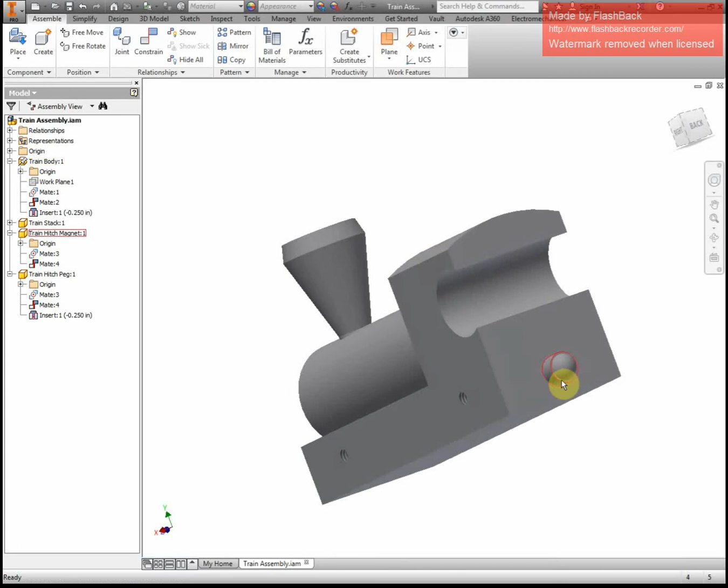One would be to make edits while I'm in an assembly. This is the train body with the smokestack, and I have the hitch peg and hitch magnet in the back. I'm going to make some edits. I told you in a couple of videos before that I need to round or fillet all of my edges, and I need to put the axle holes on the other side of the train body. I thought might as well show you this in an assembly.

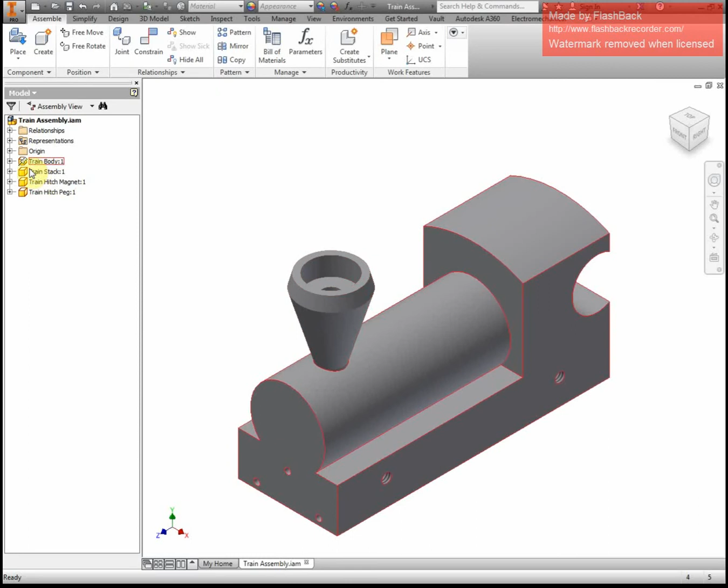It's a little bit different than the other ones, but there's really only one major thing you have to start with. If I'm in an assembly, off to the left you'll notice you have all of your parts listed. In that parts list, you'll see the train body, that's the first piece, and all the pieces are listed here. Double click on train body, that allows me to look at just the train body.

If you notice right here, the smokestack is a little bit hashed out or faded, same thing with the peg on the back. It's almost see-through. The reason is I am only technically working on the train body right now, everything else is left alone. And my bar up at the top, the browser and everything, is all the same as if I'm just working on the train part, if I just open that part like a normal thing.

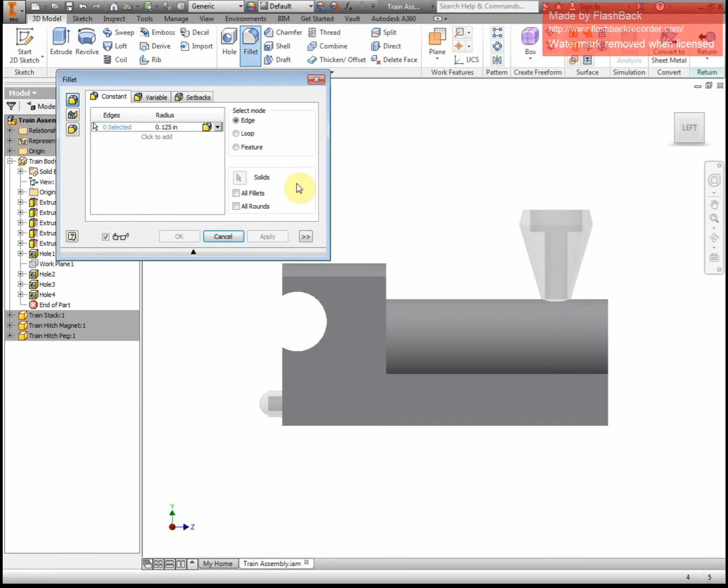So now let's go through and fillet all of the edges. We're doing it to 0.1. All I'm going to do is click on all of my seams, all of my edges, everywhere, making sure I get all of them, even these curved pieces here. I need to get these inner pieces, this outer one, that back there, just going through and clicking all of those edges.

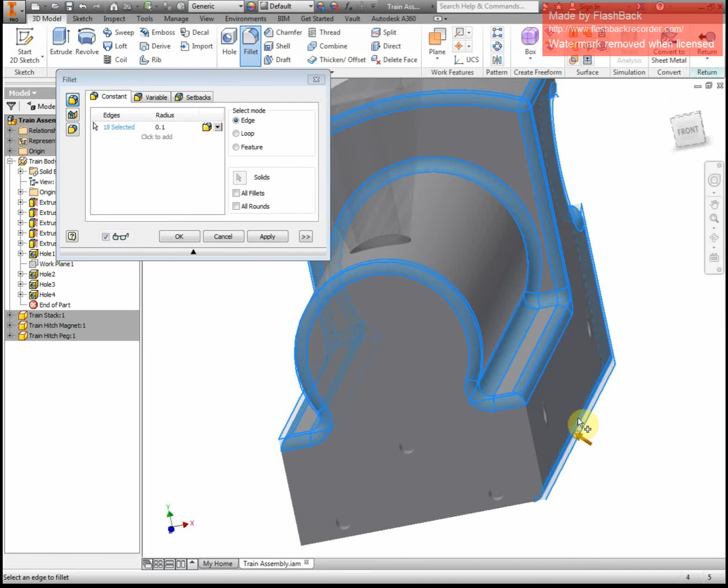It says to do everything except drilled holes. Keep in mind, this one back here is not a drilled hole. Other edge, the front, this top edge in the back. It's best if you can get everything on one pass, and then you don't have a whole bunch of pieces you have to edit around later.

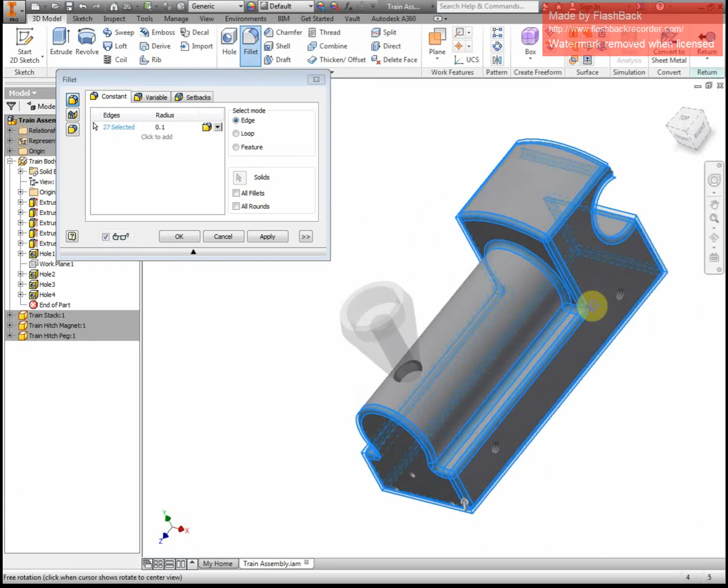This in the top, that one would be a drilled hole. Same with my axle pegs. It looks like we have everything. And how I'm rotating the train body around right now, I'm pushing or holding down on the shift button and pushing on the scroll wheel on my mouse as if it were a button. I'm going to hit OK.

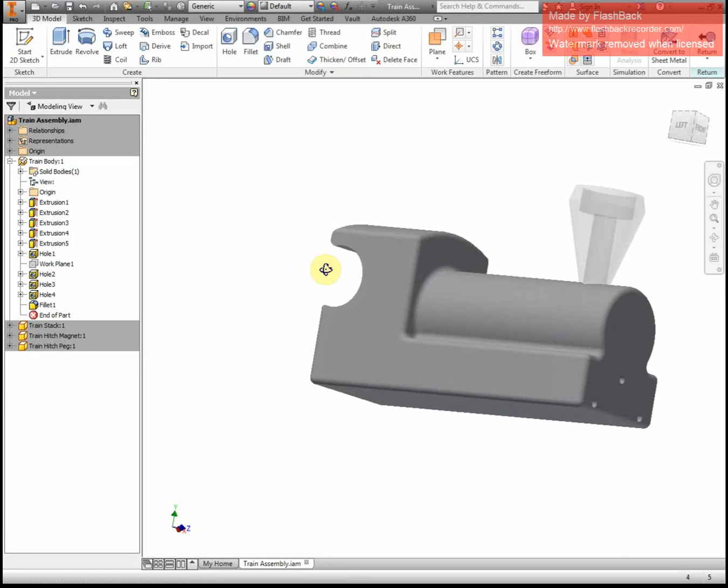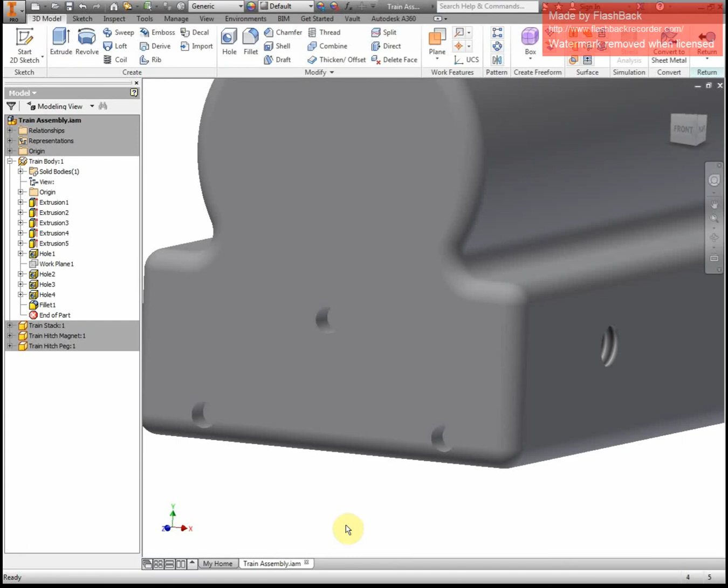Alright, those are all of my edges. Again, it looks a little bit different in here than in the part view mode, the color is just a little bit off. And if I look square at the front, you'll notice that these bottom holes, this one and this one, look like the fillet is kind of cutting it out a little bit. It's supposed to be that way. I know on the pictures of the drawings it doesn't look like that, but it is like that. You built it correctly, that's just how it is. That's fine. Alright, so that's doing those edits.

I need to put these axle holes on the other side. This is in a previous video, but just in case you want to see it happen again, here we go. So I'm still editing that train, starting a sketch on this side. And I need to do holes, that's in 3D model. Actually, I first have to go and put those little spots on like last time, right?

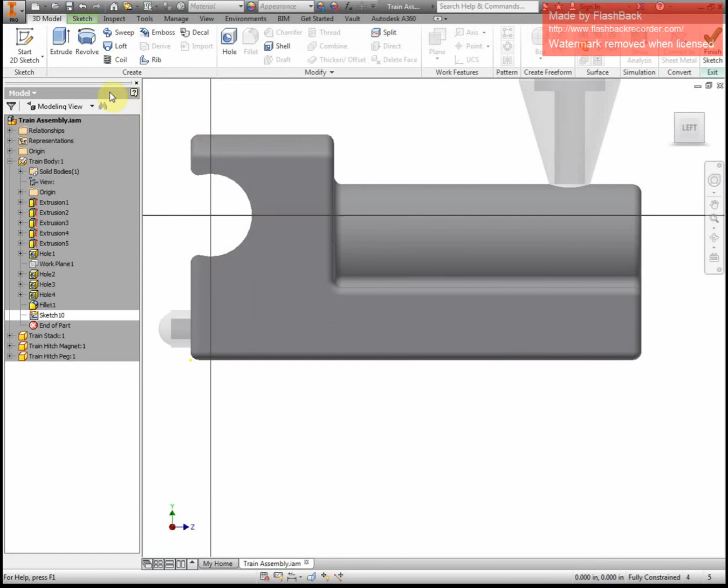So I need to put my sketch mode, I need to put a dot here. And I'm actually able to go and find, when I hover over it, it sees that hole on the other side. I'm going to put my point right on the center of it. Same thing on the other side. Oh, there's my hole, I'm going to zoom in. That's my center. So I put my points on those two spots. You can kind of see now they're yellow.

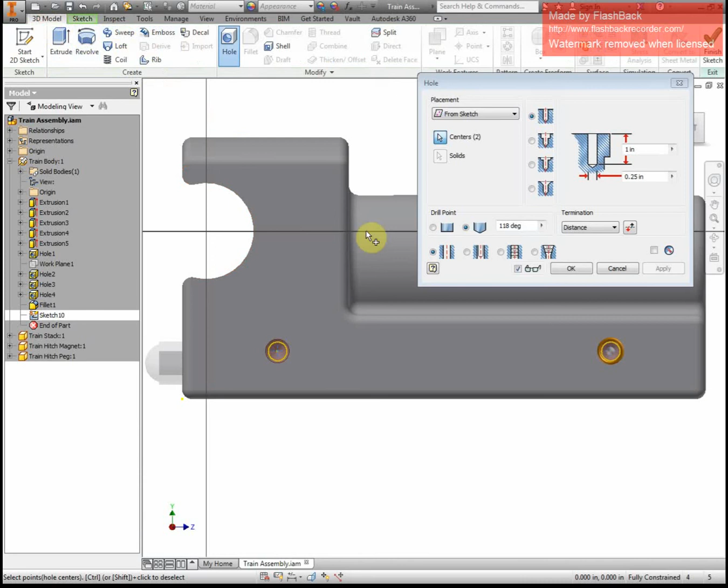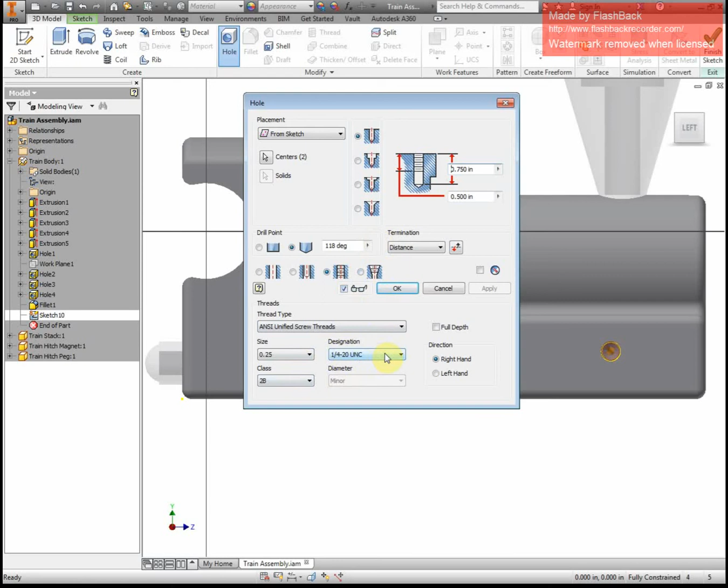Now I'm going to go to 3D model and hit hole. It finds those spots, and let's make sure we check all of the depths and everything. Our depth is 0.750, our width is a quarter. We need to change it to a tapped hole, also sometimes called threaded, is a 1/4 inch, so my 1/4-20 UNC, that's the type of threads. That's good, everything looks good there, so we're going to hit OK.

And now we have our holes in there on both sides, and those were all the edits I had to make to my train. I also don't think I showed you about that hole in the back before. A couple of my students were yelling at me about that. But that's not a hard hole to make, the directions are on the plans.

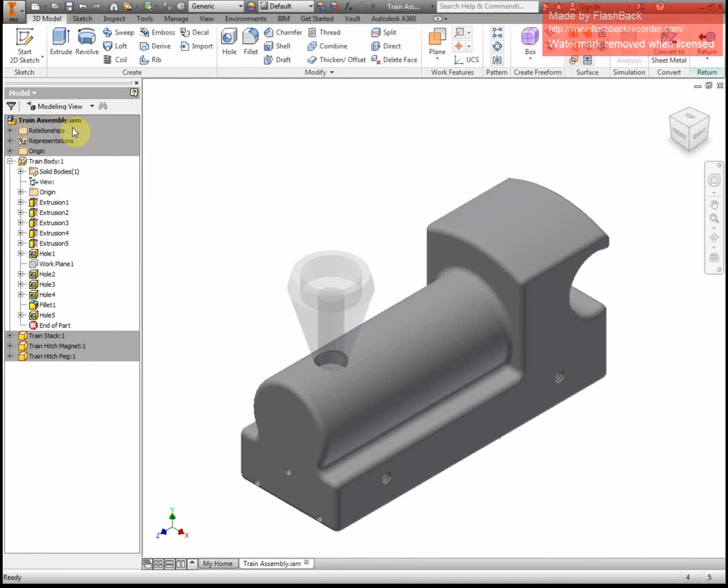When I want to get out of this sketch mode, if I'm done editing the train body and want to just go see the assembly or start adding more pieces, I double click on train assembly.iam. Everything goes back to the way it should look, and my top browser or top ribbons now look like I want to place views or create things right here. So now that I brought up create, I do want to just note here I can make parts right in an assembly.

A lot of my students tend to have issues. They'll start with something in a part, or let's say in this case a train body as one part, and instead of making a separate part as a smokestack, they try and build it off of the current train. When you do that, it's all one solid piece. You want to build them as separate things.

If you want to do it all together, so you can base it off of sketches and things that are already on the screen, you would want to do it in an assembly file. So keep that in mind. You can start from scratch and build as many pieces as you have in an assembly and assemble them as you go, or you can build all of them as separate pieces and bring them into an assembly. Inventor doesn't mind either way. Some argue it's a little more complicated when you're creating new parts in here, mostly because you're working around the stuff that's already there.